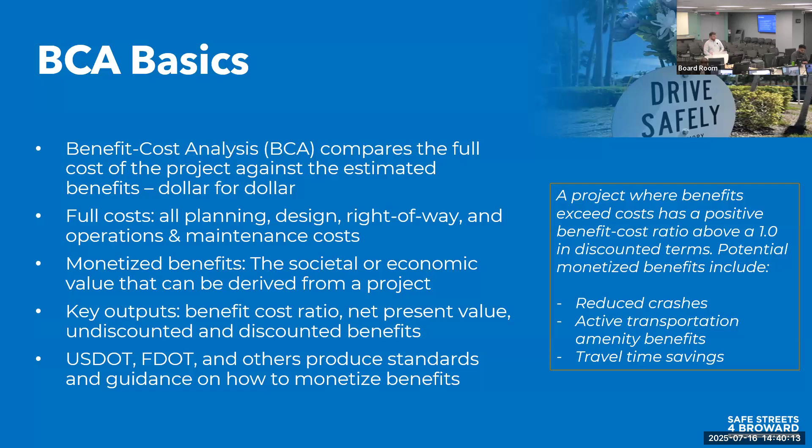But lots of agencies have guidance. USDOT has guidance. FDOT has guidance. There could be guidance from outside of transportation realms. But benefits, again, with safety, are looking at specifically reduction in crashes, but could look at a range of other variables that we've considered within this project, but really just try to focus on the safety for our corridors.

So when we're thinking about the safe system approach, which for my involvement has really been sort of the piece that we've been trying to make our numbers tell the story for. How can we quantify what a safe system approach is looking at? What we're trying to do is actually see what is the benefit when we're combining these different countermeasures as opposed to just looking at them individually.

And we're using these crash modification factors, which are set up by DOT. I think FDOT also has a database for crash modification factors, but effectively these are studies of these countermeasures that we're looking at that's actually then putting in a factor for different types of crashes and how well a countermeasure might reduce them. So they're typically academic studies, things that transportation institutes at universities are studying, and then putting this out into the realm for actually practitioners to then implement

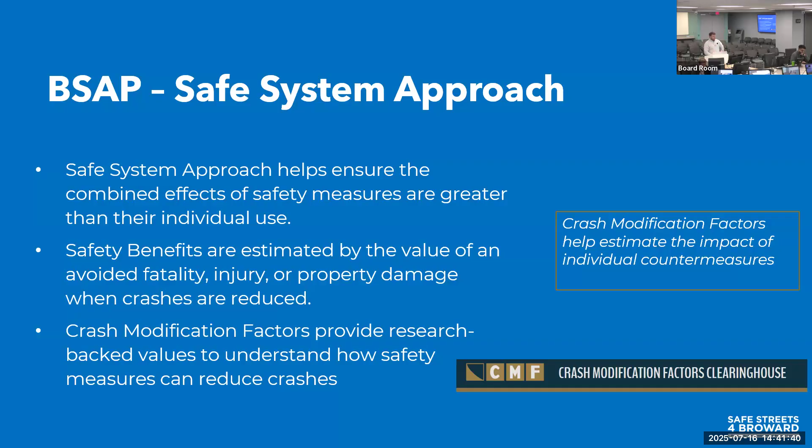within their projects. And so to actually look at the safe system approach, we're actually trying to look at how can we come up with a crash modification factor that's combined for our corridors. So we can actually say, okay, we know that there's X amount of crashes at night and certain types of projects can reduce that versus maybe an intersection crash, which is happening during the day. And we use a different crash modification factor from that countermeasure.

Again, just talking about sort of the BCA guidance, and one of the things that we're just trying to think about is how BCA guidance has been used in the past, especially for safety projects. And typically, one of the reasons why BCAs are required is because there's limited funds. We can't just fund anything that is coming up, and so we're trying to use the quantify tool to assess which of these projects might have the largest benefit.

A lot of the guidance typically realizes that some benefits are just really hard to quantify. And so few agencies, I think, are actually then strictly looking at a BCA and its results to say, okay, if you had a BCA of 1.0, that automatically gets the funding. But its use, I think, is pretty varied. What you see across, whether it's FDOT guidance or USDOT guidance, though, is that they are usually coming down to the same methodologies for quantifying the benefits.

So as you'll see when we used our tool here, some of our inputs come from USDOT assumptions that come from their guidance. Others are coming from FDOT. We thought that was right to, if we have things like the value of statistical life when we avoid a crash, we want to take that from a local perspective. USDOT one is a national level. That's including crashes of equal importance in Montana and Florida.

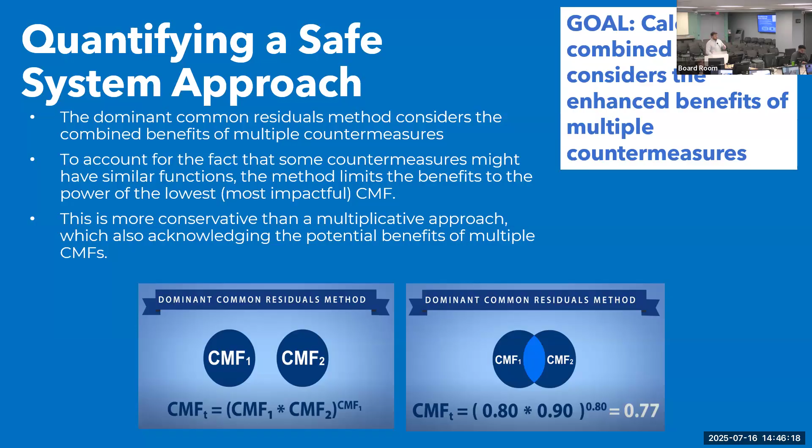What it does is instead of having this combined effect of 0.72 by simply multiplying it, you would have a combined effect of 0.77. So you're saying that we have a combined benefit to get that safe system approach, but it's not trying to say these things are working individually. Combined, there's going to be some redundancies in the crashes that we might be limiting, and this approach combines it. So we think that, one, the guidance allows us to do it, and it's a conservative approach as well.

So now that we know the main methodology for how we're going to quantify the reduction in crashes, we're just going to take a look at what the tool's doing. This is the tool that we designed, and we'll go through each of these pieces. It's really designed so that practitioners, you all, can plug in your project with minimal inputs, things that have to do with the cost of the construction, identifying which countermeasures we're using, and then looking at safety data that you can upload into the tool. The tool should then be able to spit out the key values that we're looking at.

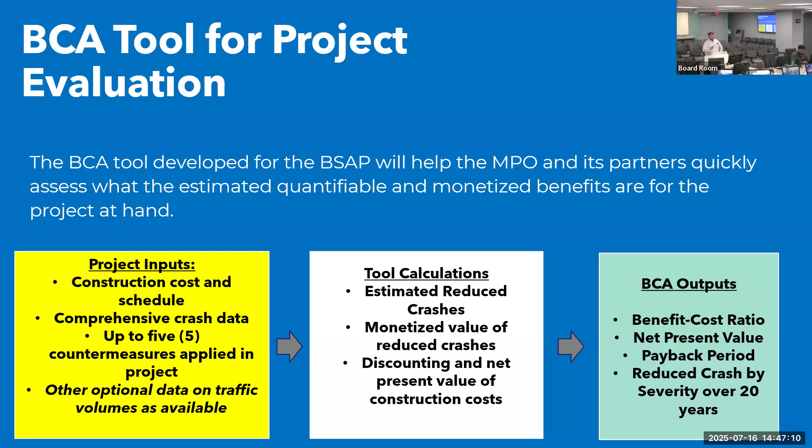It's doing the calculations internally within the Excel tool, and then it'll throw you specifically into the output table where we're going to get those main outputs like the benefit cost ratio, net present value, how many years it will take for the project to pay back its benefits relative to its costs, and a few other metrics that might come out of it.

So I'm not going to spend too much time on some of these things, but as I said, those main user inputs are things that you as the tool user would be inputting. So you need to know the total construction cost. And as you can see in small text, you would also put that in by year. So if it's a 3-year construction, put that in. It's important to try to get the years split because of the discounting nature of the tool.

We're not just saying that there could be $10 million of benefits each year. We have to discount, since benefits in the future might not have the same monetized value as benefits today. And so the tool, as a standard, is using discounting approaches. So we always want to make sure the years that we have are correct. You put in the construction costs here as well as right of way and try to make sure that those costs are as total as possible.

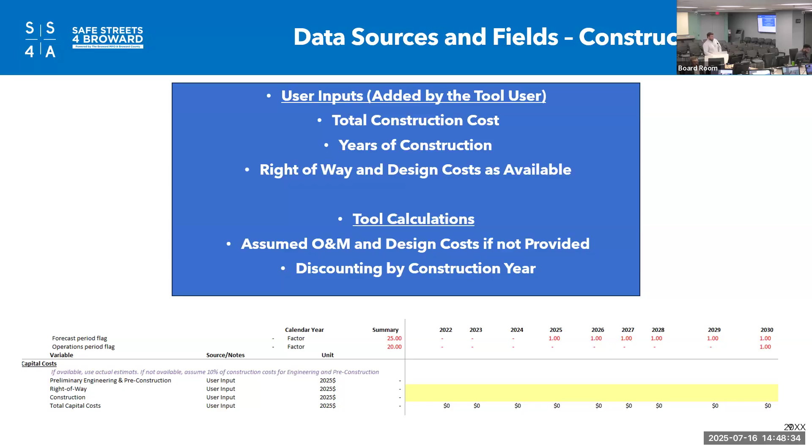You can also put in O&M costs, but our tool also calculates operation and maintenance costs by using, I think it's about a 2% value or a 1% value of the total construction cost per year as an input. So if you don't know what the O&M will be, which I know can sometimes be a difficult piece, that's something the tool assumes, as well as design if we don't really know, which would just be 10 or 20% of those construction costs.

Then the big piece that we would be putting in would be our crash inputs. As a user, this is probably one of the things that would take the longest to input, because, as in my example before, crashes at night could be reduced if we had better lights, but not all crashes on a roadway are happening at night. And so we might have a CMF that's related to those lights, but it shouldn't apply to every single crash.

And so the important thing here is that when we're putting in our crash data, you can put as many years as you might have. It's set to about 5 years, I think, within the main function, but that can be changed. We're looking at the crash data across that corridor, stratified by the severity of the crash using the typical KABCO breakdown, as well as its location, whether it's at an intersection or on the main line of a roadway, the crash type, meaning whether it involved a cyclist, a pedestrian, or just a vehicle, and then its time of day.

These categories are important for us to stratify, because the crashes in the CMFs we've loaded are categorized for each of these types of crashes, so that adding the lights would only apply to those crashes that would happen at night. The CMFs that come from the clearinghouse database we're using tell us which of these crashes are applicable, and that's why we have this breakdown.

I think it would take some time to make sure we're getting that data right. Using tools like pivot tables is really simple, and the set up is made to do that coming from the data. But this is definitely the piece that probably takes the most user input, making sure that we're applying the CMFs accurately.

This is just an example of how we use a pivot table to do this, I think it was for the Northwest 19th Street corridor, where we're getting the crash data between 2019 and 2023. We have the different types of crashes blocked off, just for simplicity, along with other information coming from these crashes. This is how we would be splitting it from the FDOT database of crashes we're getting.

So this is just our list of countermeasures that we have. This is the number of corridors. Again, these are things that were just input into the tool. We did the research on which CMFs are applicable, but the countermeasures, of course, are coming from the SS4A program itself. We're not really doing any design side on the economics tool.

We're simply trying to translate what countermeasures are being recommended, what are the appropriate CMFs if available, and then making sure that when you select a project and select the applicable countermeasures, the right crash modification factor, CMF, comes up.

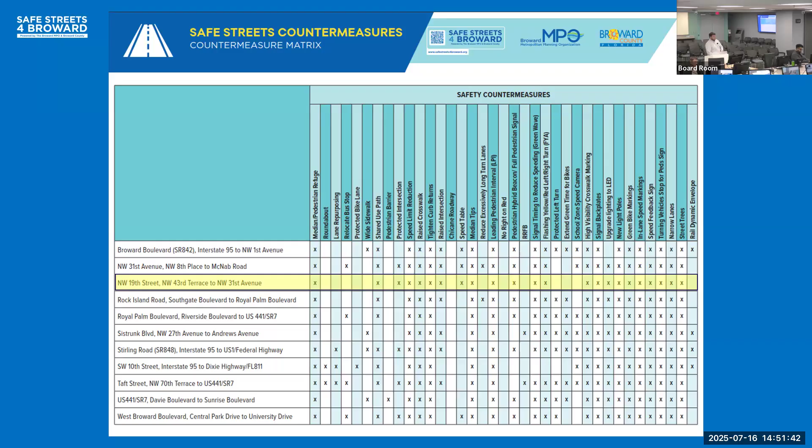It's just an example of how we apply this, and I'll go through this really quickly because I think it's a bit redundant, but this is how we applied it for the Northwest 19th Street corridor. This was the list of the different types of countermeasures that had an applicable CMF.

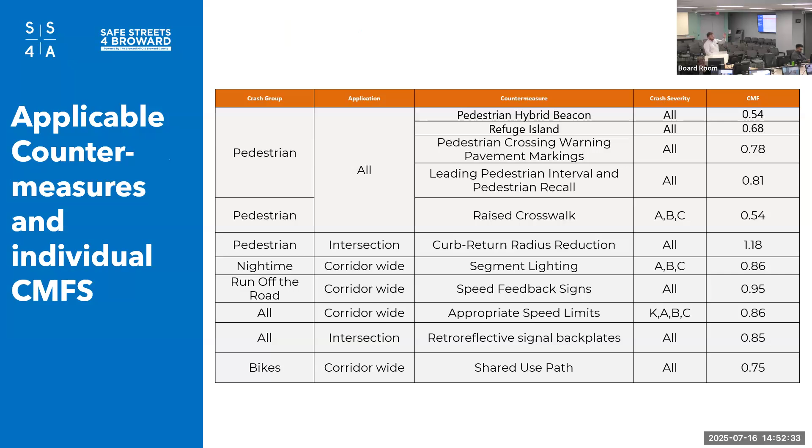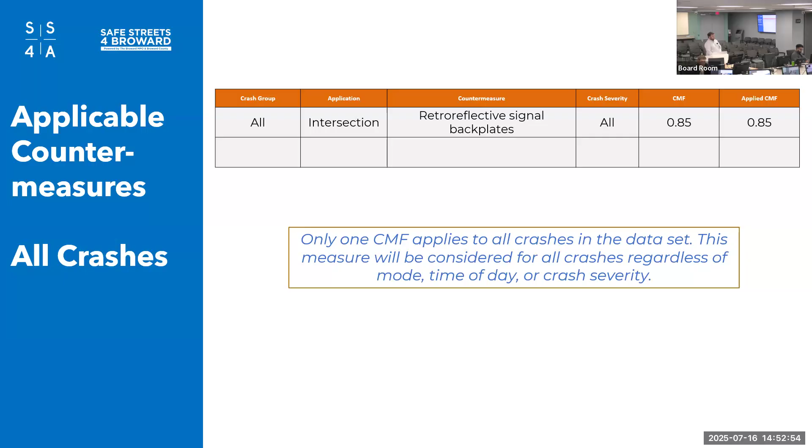The way the tool works is it simply looks at if a project or a crash identified just hits one of these CMFs, you would just apply that. So if any crash was at an intersection but wouldn't have had any other benefits, it would receive a benefit from the retroreflective signal backplates.

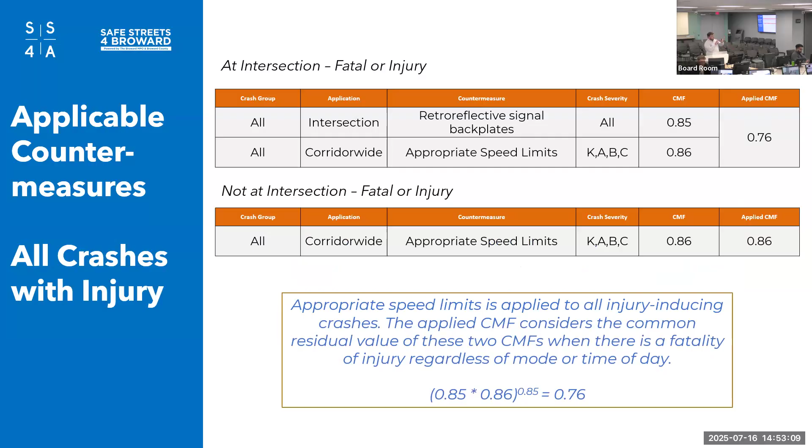But then as we add crashes, that's when we do that multiplying while limiting it to the power. This is how you start to then add in the different crashes to get this combined CMF for that corridor, or really for that type of crash if applicable.

So then, at a high level, this is how we are really applying these crashes, just to kind of then go into how we can take a project that's designed into monetized values.

We're taking here some of the key inputs that we have, things like these are all things that you're not inputting, that are already set within the project. You would identify maybe the opening year, but its operating period, typically we're using 20 years. Number of crashes is coming from the crash data. All these things like the value of a reduced crash are coming from sources like FDOT or US DOT. You would have your costs.

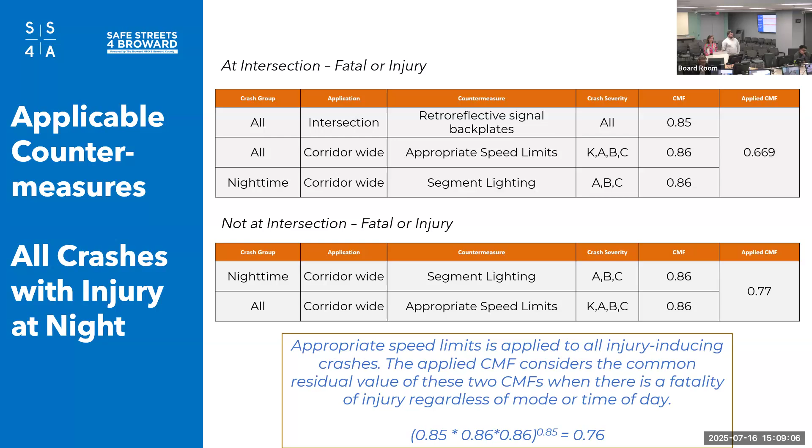Is that the next slide? Where's the slide that shows the reduction, the actual numbers?

So then you have the types of the variable column here. With your reduction, we could add another column showing before and after, and you've got them by type. Then you multiply them by the KABCO numbers on the previous slide - those numbers are in the second set of boxes. So no injury crash is 7,700.

Gotcha, thank you. Sorry, this is new for me too.

I'll preface this by saying when we started this contract over a year and a half ago, there was a big push, to your point, about how federal grants were going to all require BCAs. So as part of our scope we said we need to make sure we're doing BCAs for all of our corridors. But the federal requirements have kind of shifted in 2025. We still wanted to give the region this tool to try to monetize the value of putting in countermeasures, so that's why we created this own unique tool.

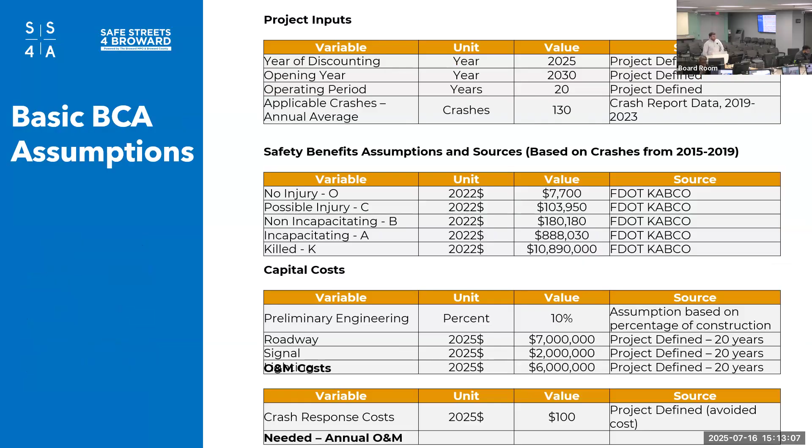Another piece that's changed, which gets a little technical, is the way we discount these things. Discounting can be a little complex, but we were using, for the past 3 or 4 years, a discount rate closer to about 3%, which reflected lower interest rates that were being accounted for. But the most recent federal guidance lifts that to 7%, which makes it harder to show that benefits down the line, say in 20 years, really still have the same value.

It's the right way to do this sort of economic analysis, to include that discounting and make decisions based off of that. It just makes it that much harder to show a benefit cost ratio where the benefits of something 20 years down the line, even though they're steady in real terms, could then be going down once you discount them.

Thank you, Brian. Just a few things I want to point out. First, I believe you developed some kind of tool, probably in Excel, to perform the BCA assessment. Can you share that Excel file with the group? And then maybe in the future, if time and resources allow, a training can be held so everyone knows how to use that Excel file well.

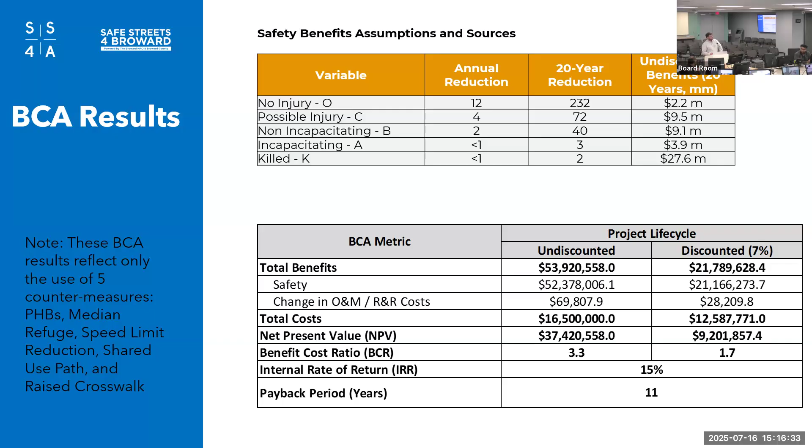What is 23? Slide 23. Yeah, I think it's this, but you mean like that summary table for each project? No, the next slide. This one, yes. Oh, I see what you mean.

We are planning on providing that tool at the end, when we finalize the corridor reports. So we will be posting the tool.

Yes, we're definitely going to need somewhat of an explanation. I know Brian went through this, and I know you all can do it, but we're definitely going to need some form of a how-to guide on how to use it and how to input the crash data so you can get the information you actually want out of it.

I think it's probably useful to go through one of these projects as an example and see the sensitivities of it. If you were to reduce your crashes by half, how that might change the monetized values, or if we were to add one additional pedestrian fatality that I found on this corridor to the data set, how does that actually change this analysis?

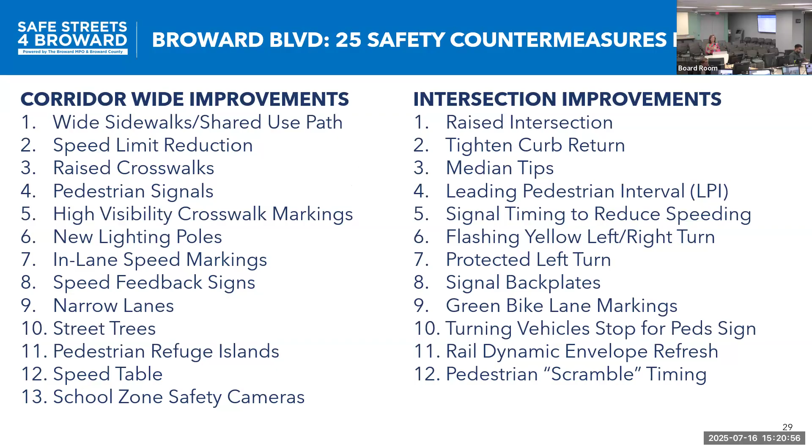So with that, I'm going to run through the 11 corridors really quickly because I'm really proud of the work that we did. So Broward Boulevard, 95 to Northwest First in downtown Fort Lauderdale. We had 25 safety countermeasures proposed, 13 are corridor improvements, another 12 are intersection. And as we talked about, we're trying to use the safe system approach. So redundancy is key. At intersections, we have a lot of overlap, right? Flashing yellow turns, raised intersections, putting all those things on top of each other in hopes of getting to 0 fatalities.

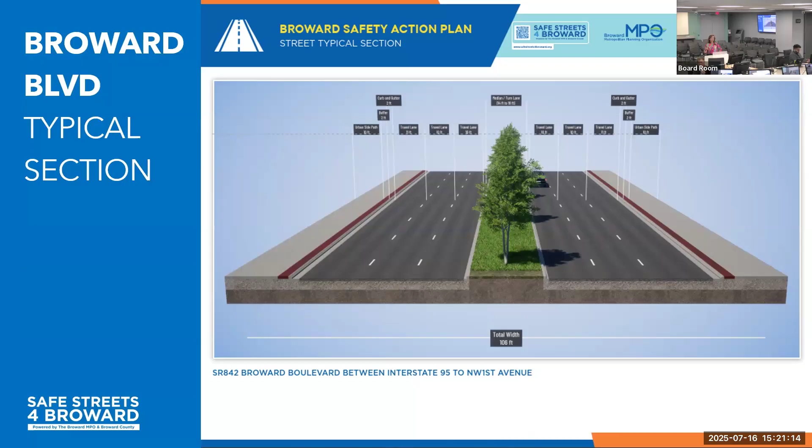This is our typical section that we proposed. No lane reduction because we have like 70,000 cars on our boulevard in the morning. It's crazy. But widen the sidewalks, reassess the bike lane space into wider sidewalk space to create safer streets. And then the corridor, which is kind of small, I'm sorry, but for each of them, we did a concept that's engineered over an aerial with the right-of-way lines.

And you can see all the improvements along the corridor where we aligned bus stops with crosswalks. This is a good one where we had existing bus stops, but we added some mid-block crossings that are signalized, a lot of raised elements to get people to go the target speed of 30, 35 miles an hour. Obviously, you're in downtown. As a reminder, this corridor is on the state's list of top deadliest bike and ped corridors, unfortunately. So really getting those speeds down as you enter downtown is key.

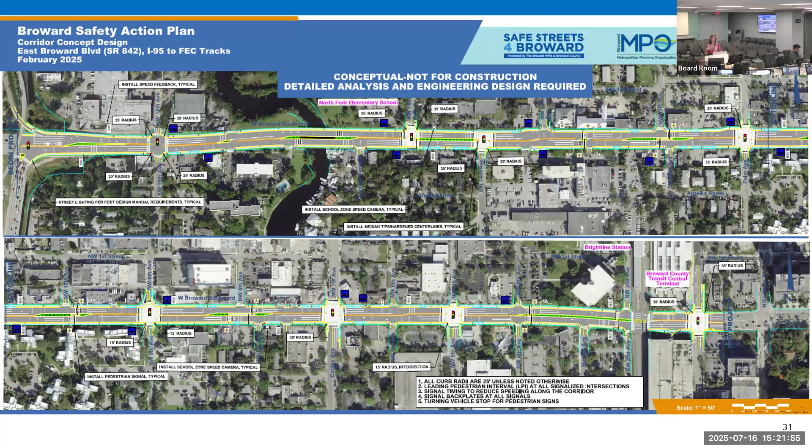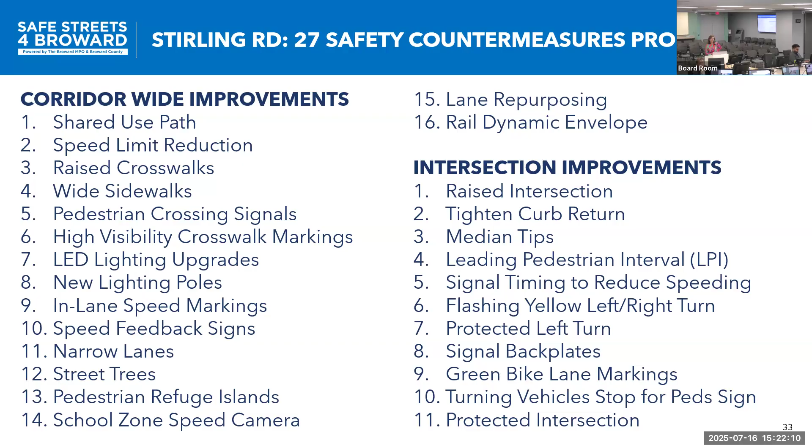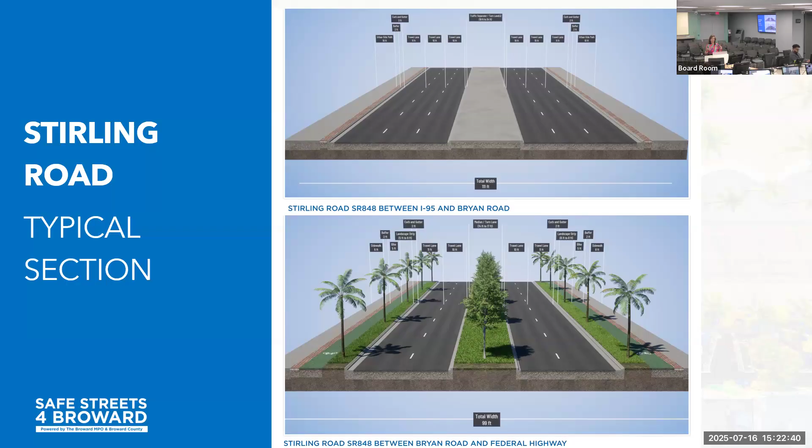Stirling Road is another FDOT corridor. Our corridor was 95 to US 1. On this one, we had 27 safety countermeasures proposed, 16 corridor, 11 intersection improvements. I'm just going to quickly go through these. This one had 2 segments. So from I-95 through the Dania Pointe development to Bryan Road, you can see the top section. We kept the lanes because we've got those big developments on both sides, north and south. And then as you go east, we were able to repurpose the lane going east to US 1. You've got a residential area and were able to get those protected bike lanes, wide sidewalks, tree-lined. So that's the intent of Stirling.

Here's the layout. You can see the interstate on the top left, and then Dania Pointe, and then that Oakwood Plaza is on the north and south. As you get to Bryan Road, which is that first intersection that's coral color, it's a raised intersection to enter into the more residential local context. And then through there, you've got the 4 lanes, medians, offset sidewalks, tree-lined streets, raised intersections, raised crosswalks to connect transit.

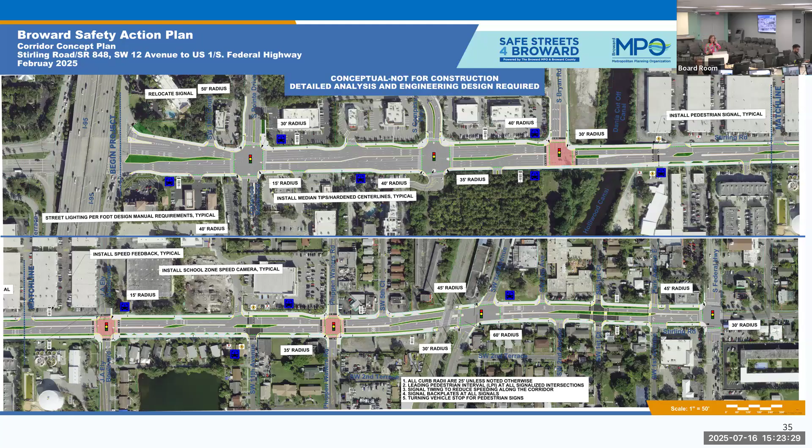We've got kind of a wonky intersection at the railroad that we were able to tighten up. People are having issues stacking up on the train tracks and not being able to see the signals. So really tightening up that intersection there. And then just really tightening everything up and being able to create a safer street.

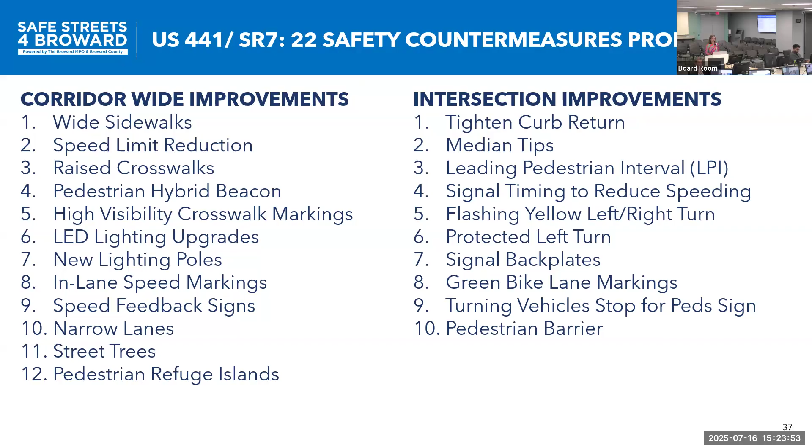The third FDOT corridor is US 441 from Davie Boulevard north to Sunrise Boulevard. This is Fort Lauderdale on the east, Plantation on the west, and Lauderhill on the north. So we've got 3 cities. On this one, we've got 22 total safety countermeasures proposed, including 12 corridor-wide and another 10 intersection.

Within this one, we have 2 cross sections, very similar, keeping all 6 lanes. This corridor has a plan to have Premium transit on it, so we were aware of that. So there hopefully will be a bus priority lane at some point. But widen the sidewalks. The one on the bottom is to take the existing bike lanes and make them into wider sidewalks. So we're able to reprogram that space and then obviously keep the medians and narrow the lanes.

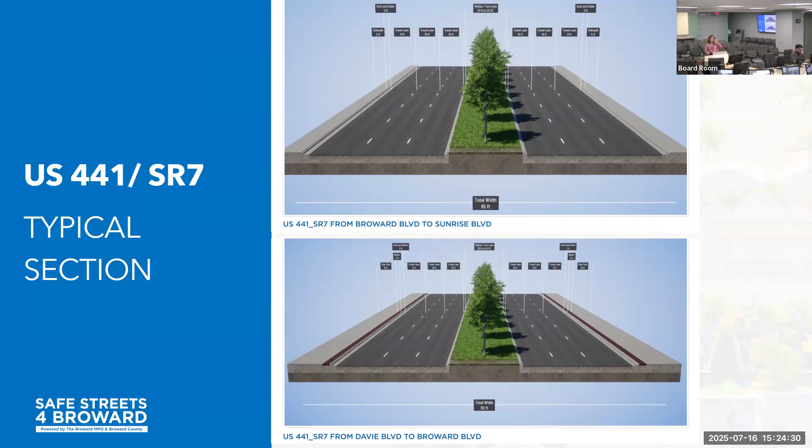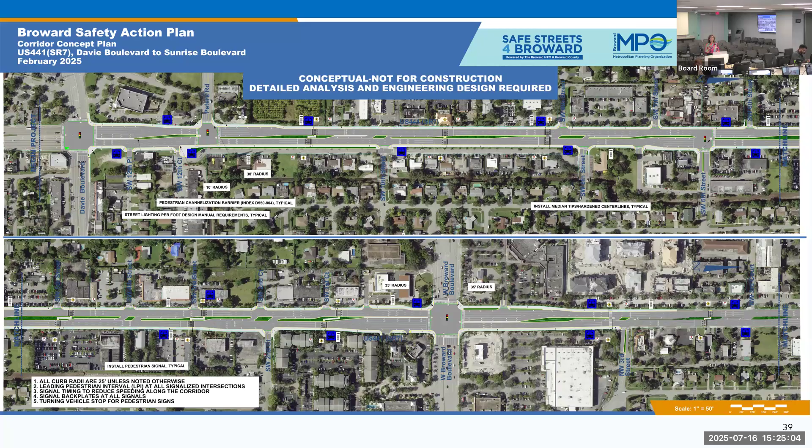And then this one's a little longer, so I've got 2 pages, but the top left is Davie Boulevard, and then you move north to the right. And really trying to add medians where we could to improve safety, add mid-block crossings, raise those crossings, align them with bus transit to try to get the speeds tempered just by trying to narrow everything up and then widen those sidewalks. So unfortunately, not enough space to put in landscape buffer between our sidewalks and our cars, but just trying to squeeze everything down and then get the speeds way down was the main goal here.

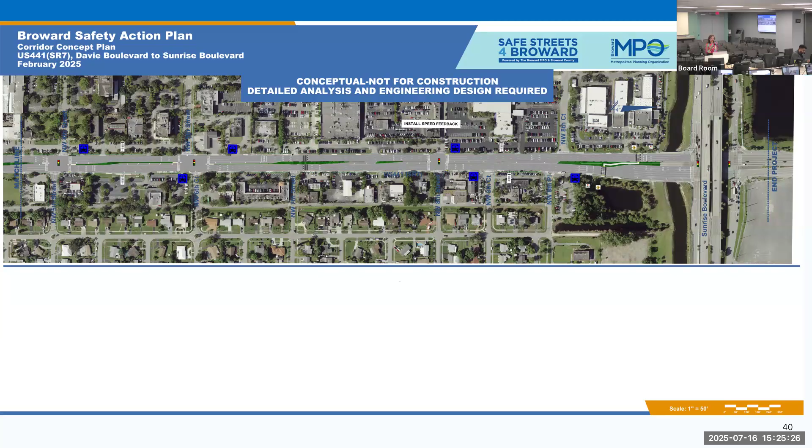And it goes all the way up to Sunrise Boulevard. You'll see on the right side of this screen, there's a trail that runs along the south side of Sunrise Boulevard. And so we've included the trail crossing as a proposal there to get people across safely.

So then we move into our county corridors. So 31st Avenue is our longest corridor. It's about 5.2 miles from Northwest 8th Place, which is just south of Sunrise Boulevard, to McNabb Road. This touches 5 cities, if I can remember all of them. Fort Lauderdale, Lauderdale Lakes, Tamarac, Lauderhill, and who did I forget? Oakland Park. So, right? I'm looking at Karen. Is that right? So 5 cities.

This one got packaged up by Broward County to propose for a Safe Streets for All implementation grant. So very excited about this one moving forward. This is unfortunately the riskiest Broward County street to travel on currently, but hopefully not for long. We have 26 safety countermeasures proposed, 15 corridor wide, and then another 11 at intersections, of course, trying to get that redundancy at all those locations.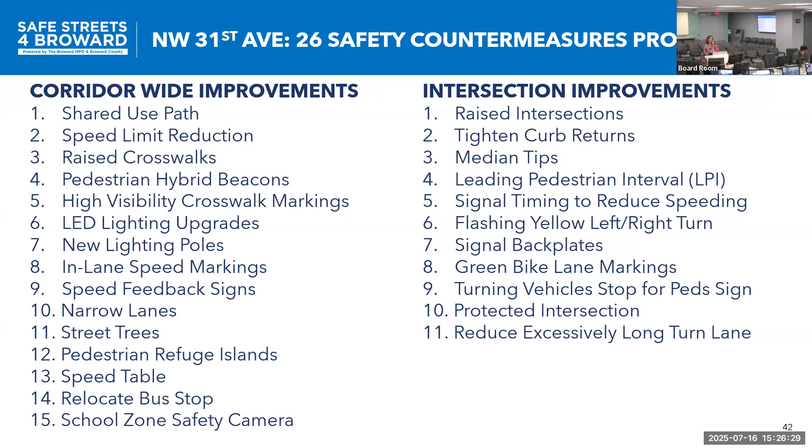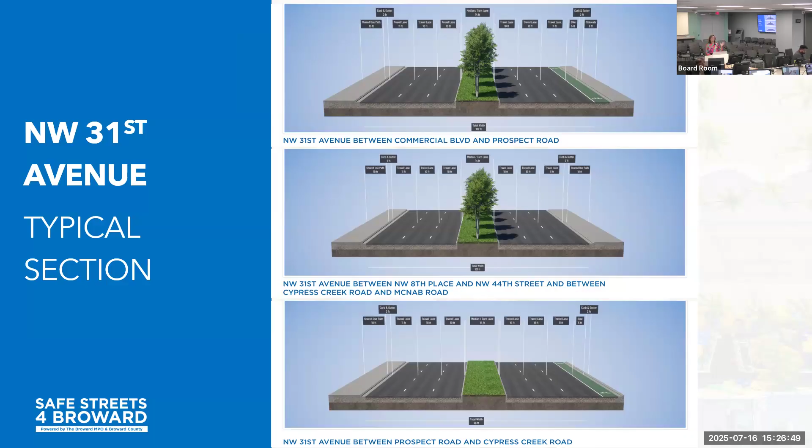Our typical sections, we had several because the right-of-way changed and then the opportunities changed, but basically trying to get really wide sidewalks, especially a consistent wide sidewalk shared use path on the west side of the street as you move north. In some areas, as you can see, we have dedicated bike lanes, so we kept those where they were.

And then this one's really long, so I apologize, it's super small because it's 5 miles. And I didn't want to bore you with like 20 sheets. But overall, you can see we've laid out all the lanes, mid-block crossings, raised intersections, narrowed the lanes, added trees, and then all the technology. We have a school zone on this one, so proposing adding all the school zone amenities, proposing cameras, the new safety cameras as well.

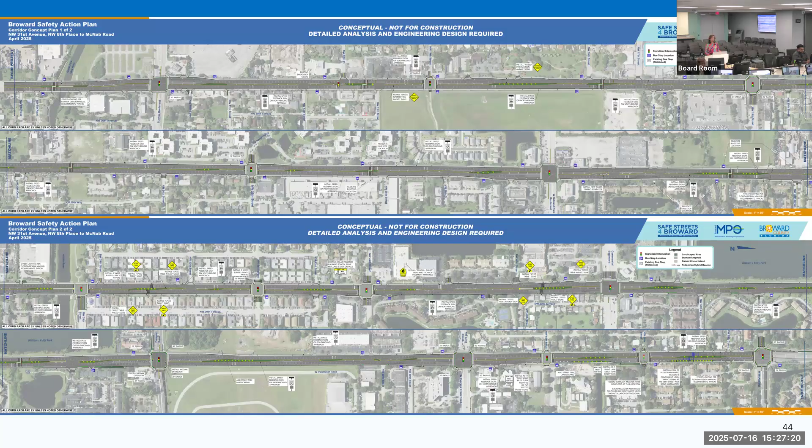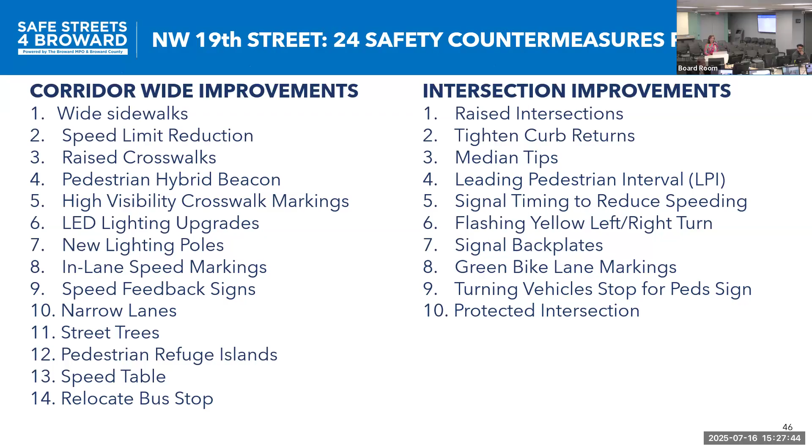19th Street is next. 19th Street is also a county corridor. I think my limits are completely wrong. I'm sorry. So the limits on this one are 43rd Terrace all the way to 31st Avenue. The corridor wide improvements, there's 14 and then another 10 intersection for a total of 24. So trying to get improved speeds basically is a big one here. We do have some trucks with some industrial here, so making sure that we're accommodating those turns.

But on the 43rd to 441, there's actually an MPO county project that's being constructed right now. So that'll be the cross section you see on the top. And then from 441 east to 31st Avenue, basically we're going to take the shoulders, narrow bike lanes there now. So kind of take that space back and do really wide sidewalks on either side and then narrow everything up.

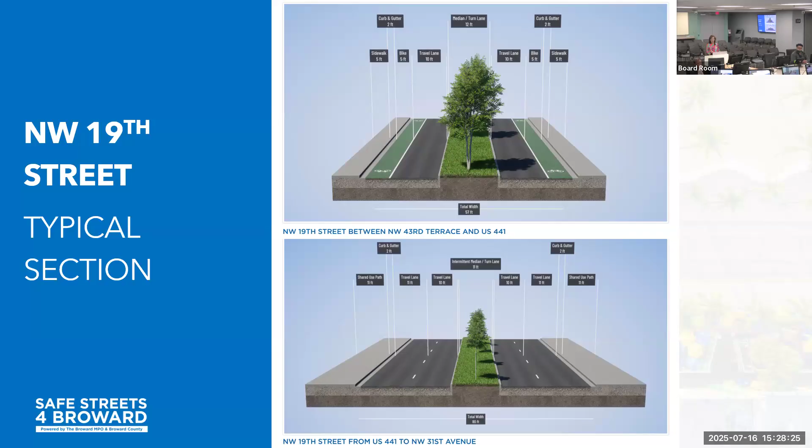Add trees. So here you can see on the top, the center is your 441 intersection. So we'll take it kind of from there to the east to 31st Avenue, add medians, add trees, raised intersections, raised crosswalks. We've got some speed tables as well. You can see the industrial along the north. So making sure that trucks can make that turning movement. So made sure we didn't block off anything with those medians, but trying to balance everything.

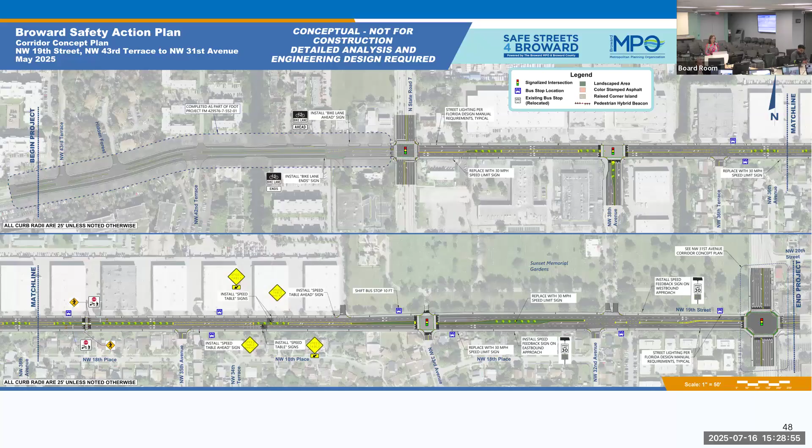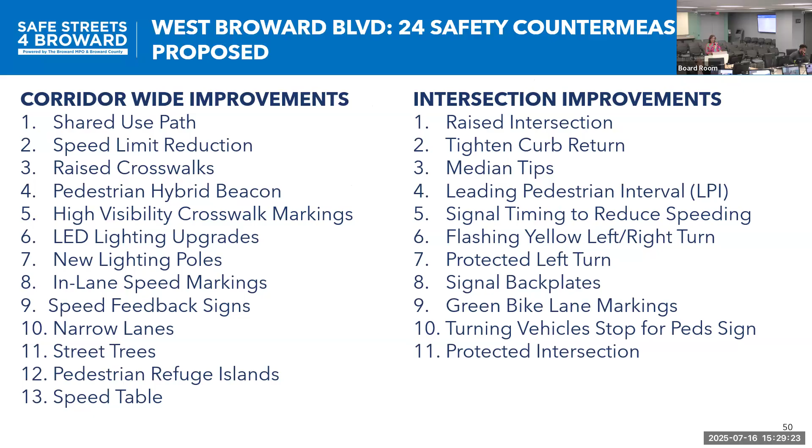All right. West Broward Boulevard is also another county corridor that's in the city of Plantation. Limits are Central Park Drive to University Drive. So this is a county corridor. West of University is not state, it's county. And here we have 24 safety countermeasures proposed, 13 corridor, 11 intersection. This corridor is where the county offices are, if you guys have been to Broward County.

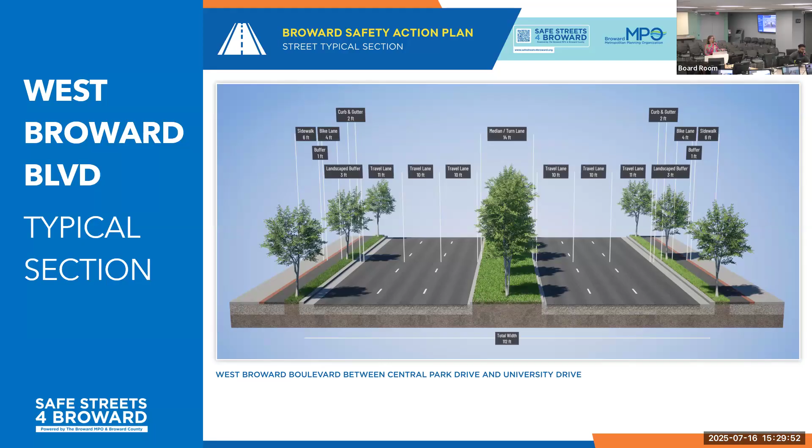The cross section is keeping the lanes, but basically narrowing them up. So you've got 10-foot inside, 11-foot outside for transit. And then by kind of squeezing everything together, we can create that space that's separated for bikes and peds. So we've got really a narrow landscape buffer. I think it says 3 feet. And then you can see the bike lane and the sidewalk are there. And trying to fit as many trees as possible to get that enclosure feel.

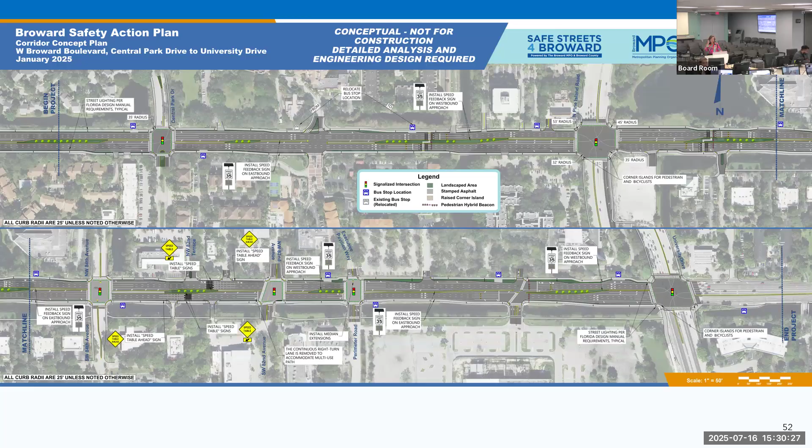This project, top left is Central Park Drive. You can see Central Park is on the north side there. And then as you go east, Pine Island, and then the mall, Broward Mall, is on the south as you go east on the bottom to University Drive. Again, medians, trees, aligning bus with raised crosswalks, a couple of raised intersections to really get those speeds down, speed radar signs, and then of course all the technology at the intersections.

All right. So starting with city corridors, Royal Palm Boulevard is in the city of Margate. This project is Riverside to 441. We have 23 safety countermeasures proposed on this corridor, 14 corridor, another 9 intersection.

This one is 4 lanes existing, but really, really wide lanes and a very wide median. So we're able to kind of reallocate the space from the median to create 2 landscape buffers on the sides, is how we did it. So no new right of way, just taking that space, reallocating the space.

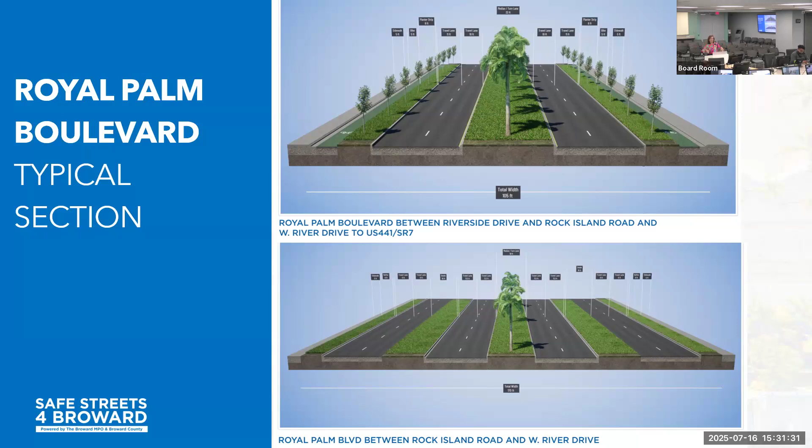So you can see we got protected bike lanes and sidewalks on both sides on the corridor from Riverside to Rock Island. And then when you get to Rock Island going east, there's these frontage roads that exist. So our thought was we'll use the frontage roads that are very low volume as our parallel bike facilities and keep the bikes and the peds separated, and then just narrow up the street to do some traffic calming.

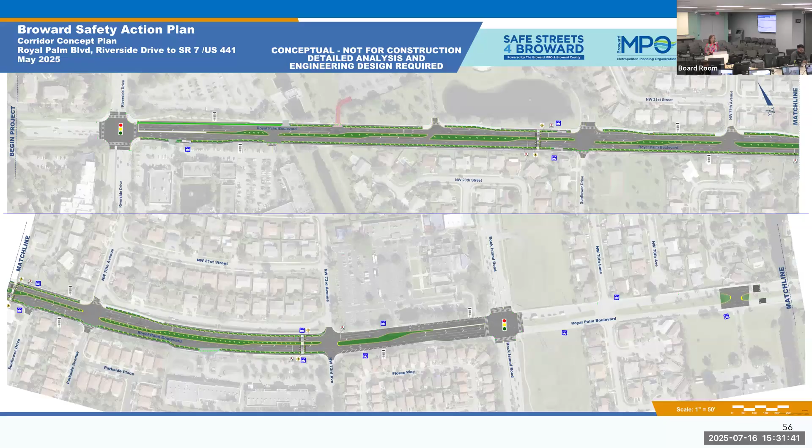And these are the concepts. So you can see a lot of green is kind of shifting to either side. Right now there's a really wide median. And then here we just did spot improvements. So we just showed the aerial with the spot improvements. So you can see kind of some intersections and some raised crosswalks, some median tips.

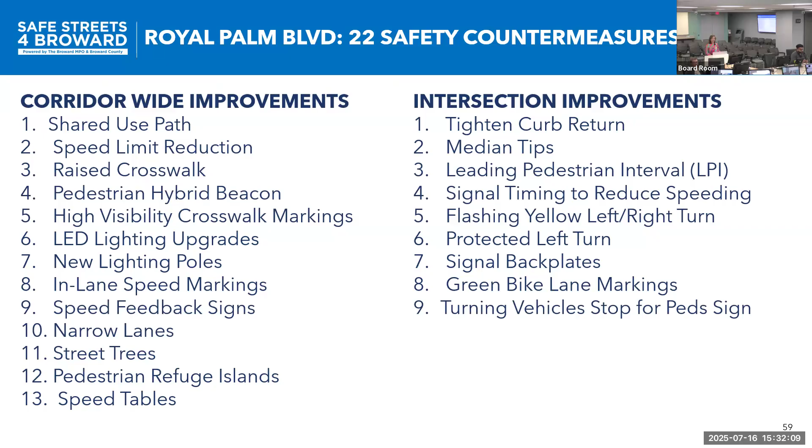Rock Island is another corridor in City of Margate. Our limits are Southgate Boulevard to Royal Palm. This one has 22 safety countermeasures, similar to Royal Palm. It's a similar suburban context. So 13 corridor, 9 intersection.

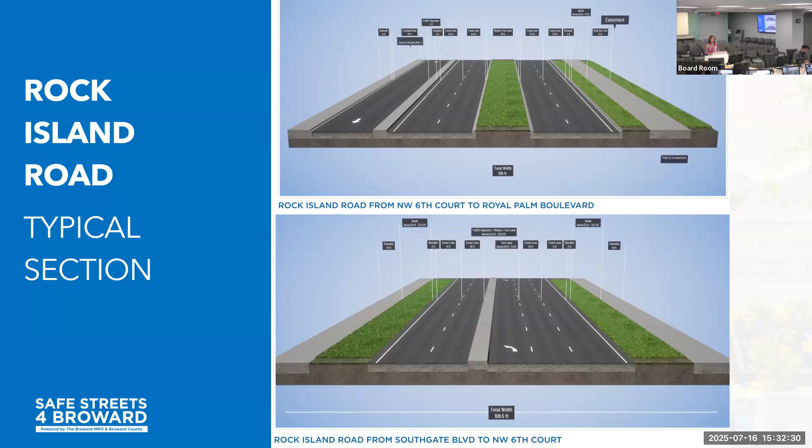This one also has that frontage road, as you can see on the top. So you've got kind of this frontage road feel, so kind of putting the bikes there. And then as you move south, the frontage road drops. And so really creating those wide separated spaces for the pedestrians and then narrowing up all the lanes.

Speed is really a big deal on Rock Island and Royal Palm. You would think because it's in the suburbs that there would be less people crashing, but there's a lot of crashes here. And the speeding is evident when you're out there.

So this one starts at Southgate Boulevard, which is kind of not a square intersection, as you can tell. So making sure the turning movements work for the vehicle types. We tightened up that northbound right turn, which was kind of a high-speed right. So we put some curvature in it to try to slow that down.

And then you can see just north of Southgate Boulevard, there's a canal crossing. So we proposed adding a trail crossing there with a raised crosswalk and a signal there. And then as you move north from there, it's really narrowing up the lanes and then creating really wide shared use paths on both sides.

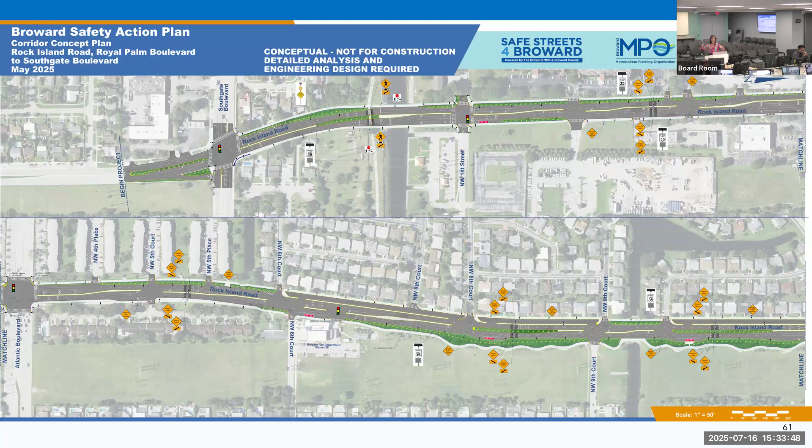And as you move north, north of 6th Court on the bottom there's this really big swath of green. And we understand that's an FPL easement, and the city has an agreement. So we're able to kind of widen our trail onto that easement, which was really useful. And then this goes all the way up to Royal Palm Boulevard. So it intersects actually with the other project that we did.

The next corridor is Sistrunk Boulevard in the city of Fort Lauderdale and partially in Broward County from 27th Avenue to Andrews Avenue. Sistrunk Boulevard, unfortunately, is the riskiest city street in Broward County. So a lot to do here. We proposed 25 safety countermeasures, 14 corridor, 11 intersection.

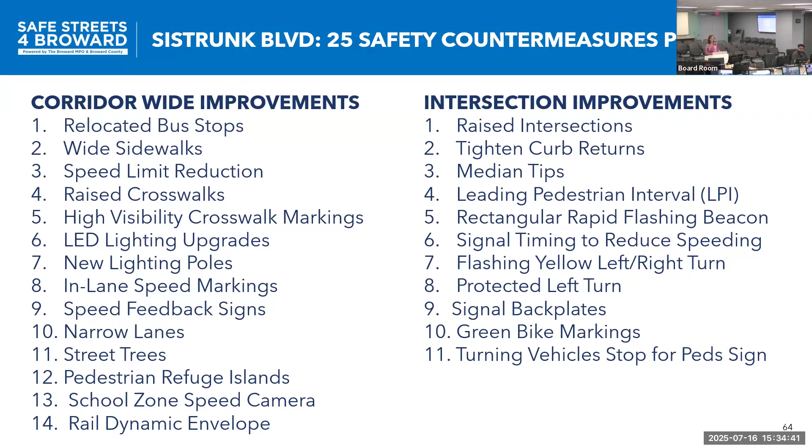The city and the county have done a lot of work on Sistrunk over the years. So some of these improvements you'll see listed are already there. Wide sidewalks is one of them. They're already there. But I wanted to make sure we were giving you a holistic list, but not trying to take credit. So good job to the city and the county already for doing a lot here, but it's still really risky. So what else can we do?

This one's really narrow already. On the west end, which is the county jurisdiction from 27th to like 22nd-ish, it's 4 lanes right now. We kept it 4 lanes, but tried to just squeak the lanes a little tighter so we could widen the sidewalks and try to separate those sidewalks.

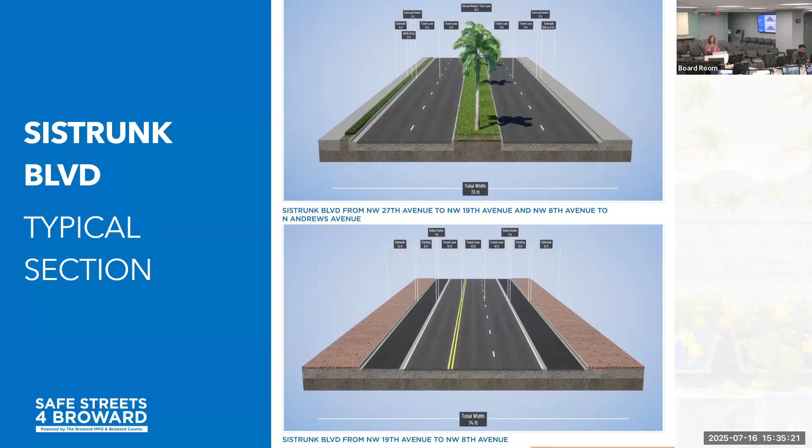And then in the city section, 22nd over to Andrews, you've got 3 lanes for most of it. And so really trying to squeeze it again, but it's really tight already. We noticed when we went out there, there's 9 and 10-foot lanes already. So really the improvements that are key on this one are going to be the lighting, which is a huge issue out there. It's really dark at night.

They have decorative lighting, and some of the lights have already been retrofitted to have a brighter fixture, but most of them haven't been, so I think that's hopefully an easy immediate fix for us. Also adding some more traffic calming, because hopefully if there is a crash in the future, if speeds are lower, hopefully it won't be fatal, right?

So adding raised crosswalks. The city is already proposing 5 new crosswalks on this corridor. I think those are going in maybe as soon as this year. So I'd really love to get this finished. So maybe you can raise them, Karen, wink wink, so we can get some traffic calming and then maybe raise some intersections.

One thing, we had both of our public meetings at the YMCA that's right in the middle of the corridor, and that's really a community center. You've got a lot of people walking to that center, but yet there's really no intersection control at that intersection where people are coming from the south to get to the YMCA on the north. So we proposed kind of a tabletop speed table for the length of the face of the YMCA, so it's like a shared street in front of the YMCA, for traffic calming and pedestrian safety there.

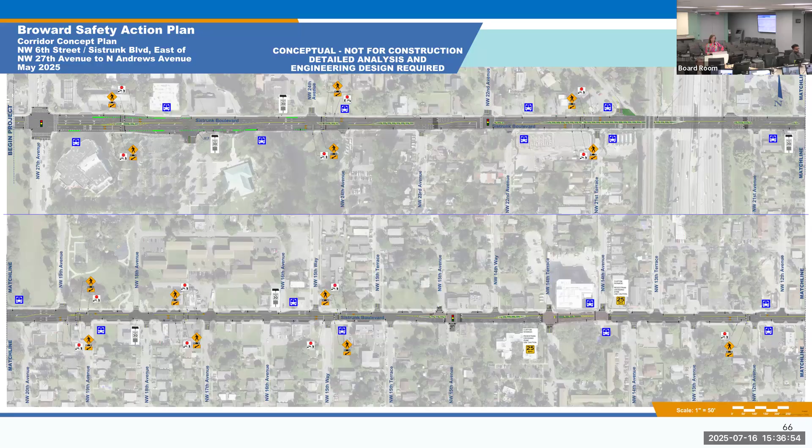So a lot of improvements proposed on this one, but we were scratching our heads because it's already narrow, right? It only has a few lanes right now. So really, how do we add more safety and get creative on this one? Lighting will be key, and safety, safe speeds will be key on this one.

Southwest 10th Street is a corridor in Deerfield Beach. This one is a city corridor east of I-95 over to Dixie Highway. We proposed 22 safety countermeasures, 15 corridor, 7 intersection, and this one we actually proposed roundabouts.

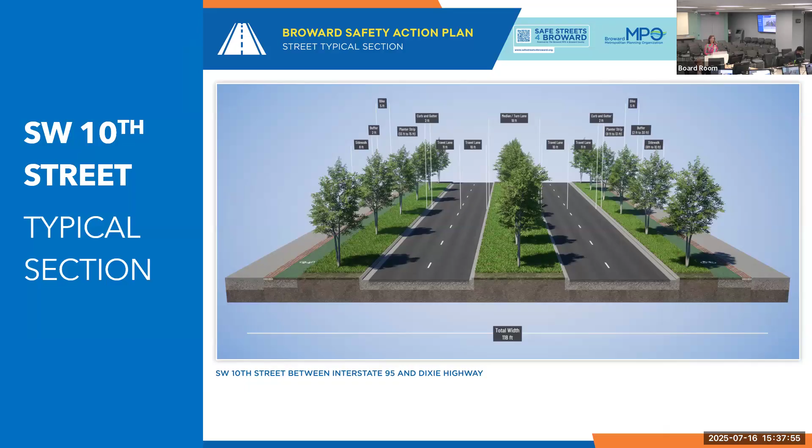So I'm really excited that we got to do something a little bit different on this one. This one is also 6 lanes east of the interstate, but the volumes showed that they would warrant a repurposing to 4. So we gave them an opportunity to reallocate that space to create protected bike and ped opportunities with tree-lined corridors on both sides.

And then this is the beautiful roundabouts. So west of here, I'm sure all of you know, we have the Southwest 10th Interchange Expressway project, and that'll tie in right at where it says begin project. The good news is that the engineer who designed this project is also leading that project. So hopefully we'll get some, what do we say?

Some synchronization between the two, because he's being thoughtful of what to design there. But the intent there is they're going to do a 4-lane local street on Southwest 10th west of here, and then the expressway functions will be separate. So those 4 lanes will tie right into these 4 lanes was the intent, giving the city an opportunity to redesign it.

And then we did preliminary lane repurposing analysis, and then we also did preliminary roundabout analysis too, to justify these. And then we were able to get creative with the geometry to fit it within the right of way. So really excited about this one. This one was also packaged as part of an SS4A implementation grant to USDOT, so fingers crossed we get both.

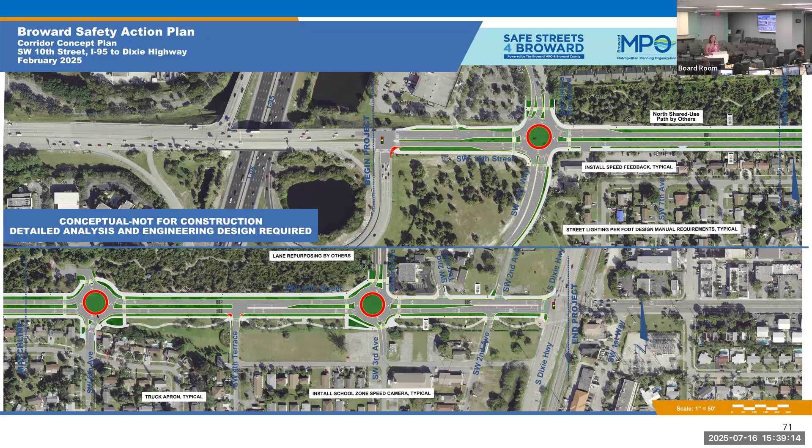Taft Street is next in the city of Hollywood. The project limits are 70th Terrace to US 441. This one has 23 safety countermeasures proposed, 12 corridor, 11 intersection.

This one, we had entertained a lane repurposing and then met with the politicians, and they were kind of on the fence to move forward on that. We had some for, some against, so we kept the 4 lanes to proceed in the corridor report. So really about slowing speeds, adding medians was a big push from the city because access management was kind of a mess here with the commercial on the north.

And then aligning our crosswalks with our bus infrastructure and then raising those crosswalks, trying to create space for pedestrians to cross safely. This area has a lot of working class families, and then you've got all the commercial on the north, and schools on the south. So a lot of people wanting to be able to just walk across the street instead of having to drive. That was the need that we heard at the public meetings.

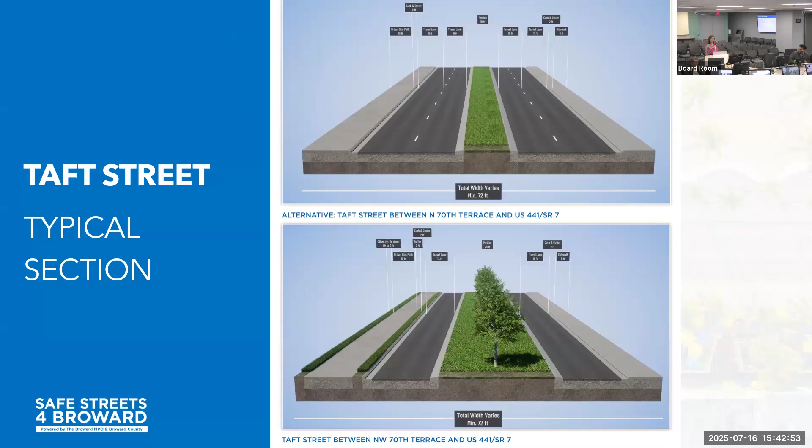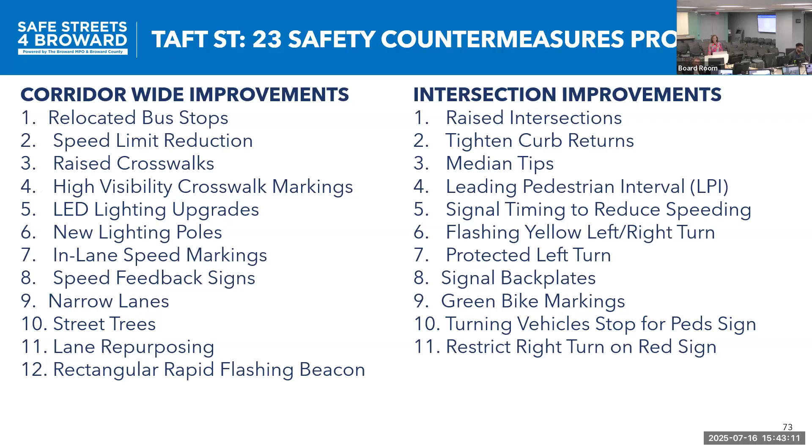And now we're going to quiz you all on how many safety countermeasures are on Taft Street. Does anyone remember? No? Oh, 24. I don't even know if that's the right answer. Close, see, 23. You're almost there, she was so close. Yeah, exactly, 20 something. So let's just remember that. Okay, well then I need the lane repurposing, then I can add that.

All right, I'm going to move on if that's all right. So we are creating a quick build design guide as one of the deliverables for this project. The intent is because we need safety now. We don't want to wait 10, 20 years to get all these projects in the ground. We want to get projects in now. So what are those tools? Creating a guide that gives guidance on what's the process, what materials are best practice, and what's the approval process for those projects. The guide has about 5 sections: introduction, the project development process, a materials guide of best practices, and an evaluation guide of how to evaluate if projects are successful. And then we did an outreach chapter on best practices, but I'm sure you guys know how to do that.

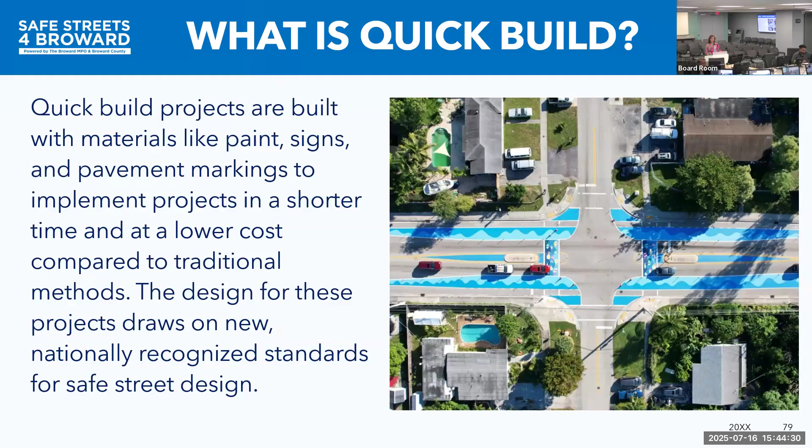Defining quick build was a big question, kind of like what is quick build? So I'll just read this really quick: quick build projects are built with materials like paint, signs, and pavement markings to implement projects in a shorter time and at a lower cost compared to traditional methods. The design for these projects draws on new nationally recognized standards for safe street design. And of course, Deerfield Beach is highlighted right there with their quick build project.

It also includes some potential outcomes. We're looking to increase safety. Number one, we want to make sure we're inviting public use of our public rights of way. Make better use of our public streets. Number three, improve business and walkability. We want people to spend money, cars don't spend money. So getting people out, improving business. Number four, improving travel options. We want people walking, biking, using transit, and feeling comfortable. So how do we do that? Through quick build methods. We included this about project types just so you can understand what's quick build compared to the long-term capital on the right.

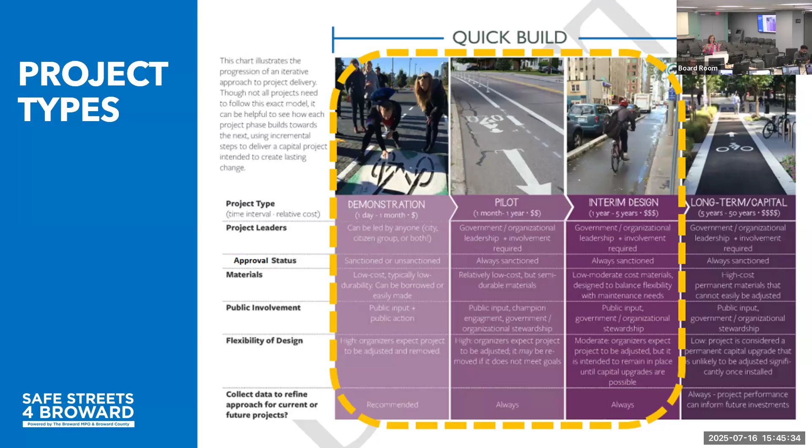So there are demonstration projects, which are like the day where you have an event and you do some chalk and really show people what it could be, maybe have a street fair, a bike ride, things like that. Then pilot and interim are kind of similar, but pilot is less permanent, and interim is more permanent, showing the different phases of quick build you could do to test things out. And then different project intents: intersection projects, multimodal projects, traffic calming projects, and creative projects that are a one-off of a quick build.

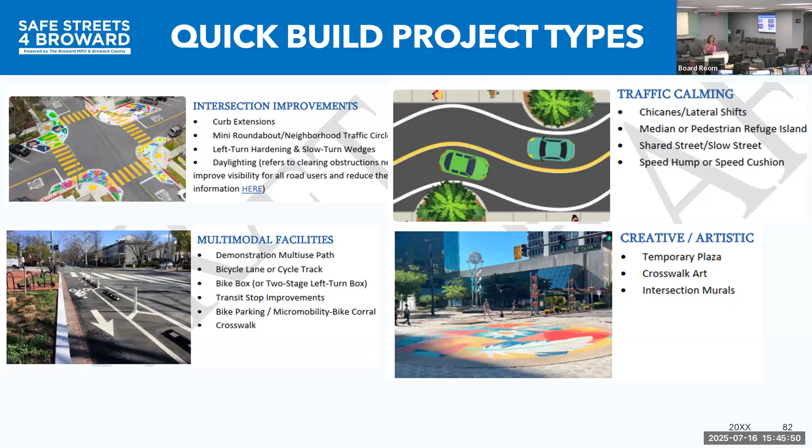And then we spoke with Broward County about their process. I know a lot of cities have the maintenance agreement with Broward County, so we included a process of what that looks like in the manual. And of course, an evaluation chapter, reminding you to take before counts so you can compare them after to make sure it's worth moving forward or maybe not. That's why we do quick build.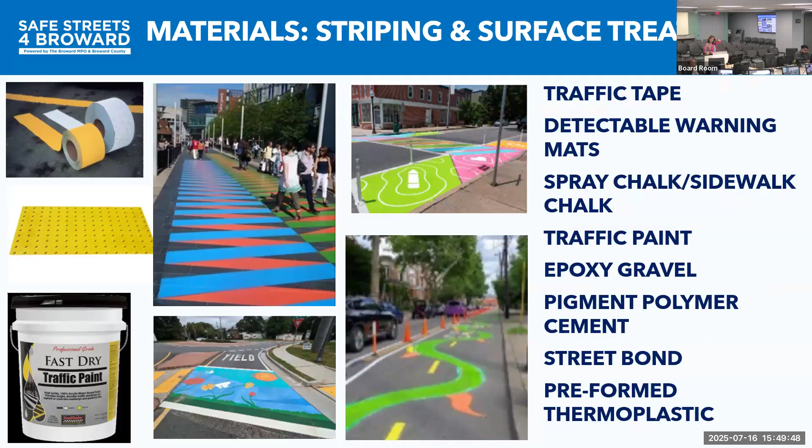Some materials included—we've got all types of 1-day materials on the left with tape and traffic paint, to more permanent materials like thermoplastic on the right. So all different kinds of materials are outlined in there, the cost, the type—I'm sorry to interrupt.

Yeah, we can talk about it after the meeting. I don't know if you want to show this slide because of the colors. Have you seen the latest memo from USDOT and FDOT? We can talk about it after the meeting. Okay, that'd be great, thank you.

Okay, these pictures are dated. I'm sorry.

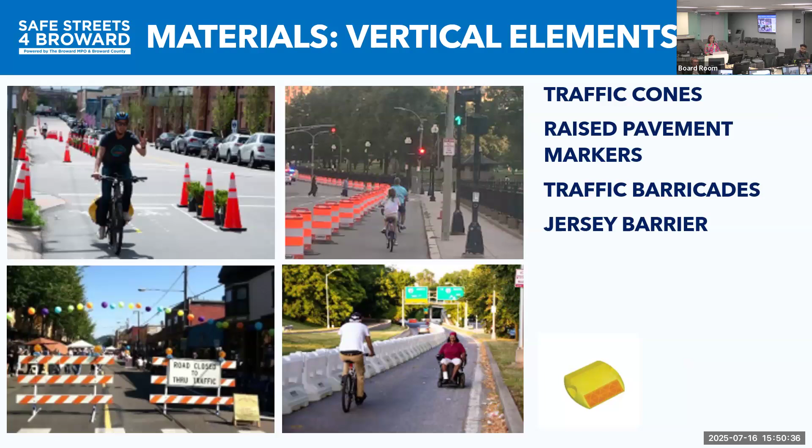Other materials, vertical elements. I've got three slides for vertical elements. These are more like temporary, like cones, barricades. These are plastic jersey barriers on the bottom here. So really doing those quick, test it out.

And then more permanent, like semi-permanent quick. You've got low profile vertical delineation, the wave delineators. Got the delineators of all types on the right there, the planters on the left, bottom left. So all different types of vertical delineation to create the space that you're looking to create.

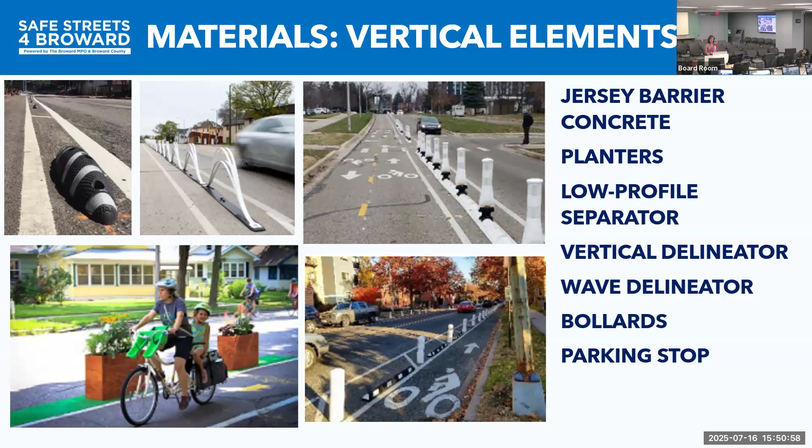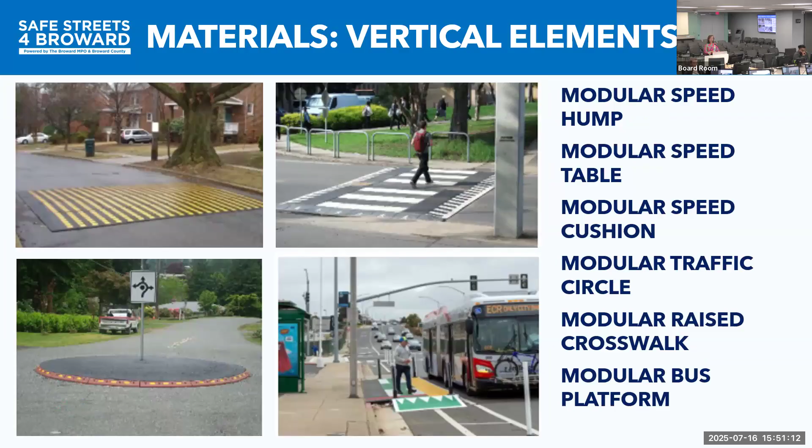And then you've got all these modular elements now. So from speed tables to raised crosswalks, traffic circles, bus stops are all these modular things that are like Legos that you put together. Really cool. So all types of different opportunities to create the project that you need.

And then we have a space for other, so stencils and signs and things like that. So the signs that are top right and bottom left are more like the one day, quick inform, right? They're not standard, but then the bottom right is more like MUTCD. So you really have to work with kind of what you're needing to propose or transmit to your community.

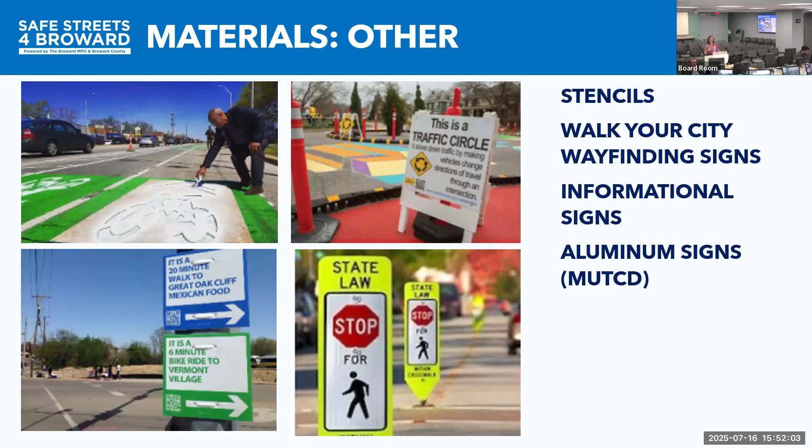I remember when we did the roundabout at 13th Street, Karen, we put a sandwich board in the middle that said, remember, yield to traffic in circle. People just weren't used to it. So even though we had the yield to traffic MUTCD sign on the yield sign, we added another graphic that showed the circulating. So really more education in a temporary way.

And then really evaluation. So we did an evaluation chapter to say, how well did this project meet your goals? How effective were your materials? Would you use them again? What did we learn? What are your successes?

And then we included these four chapters that basically are questions related to evaluating safety, and then evaluating public use, and then evaluating business. So these are just questions that you could use. And then improving travel options.

So really getting you to think about what data you need before and after, instead of, a lot of times, we wait until after and then we're like, oh, we should have checked with people before how they felt instead of asking them after only, so that we can compare before and after. You'll notice in here, some of these are quantitative, like speed counts, tube counts before and after, but then some are qualitative, like talking to people about how they feel. So it's a mixture. You'll get to decide what's best for your city or your project.

And then, of course, community outreach. We want to make sure that we're doing community outreach to build trust, but also inform the community why you're doing it with paint and sticks instead of concrete. I think a lot of people freak out when they're like, paint and sticks, why? But really that information gathering and doing that before, during, and after.

We really want to improve the outcome and improve the transparency. And then a lot of people have really good ideas, so that kind of prevents those mistakes in the future. So going out to the community. And then, of course, just a list of kind of all the opportunities, just so that you have a checklist.

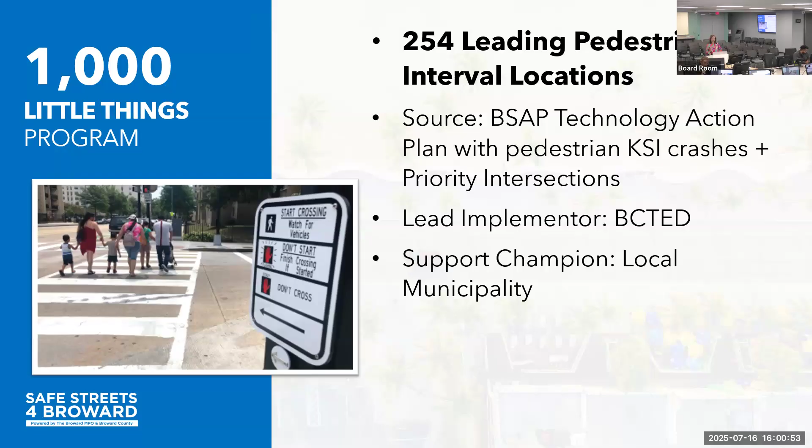We've identified 254 LPI locations. These were identified as part of the BSAP Technology Action Plan and also have at least one pedestrian KSI crash. I also added the priority intersections to this list. This obviously would need to be led by our county traffic engineering department because they oversee maintenance for all of our signals. But I'm going to give a list to all of our local champions, so if it's in your city, you'll get a list of these locations so you can be aware.

The next one is bike detection. This also came out of our technology action plan, where we've had bike KSI crashes. We had a couple meetings with the county about how to do this, and basically what they said was if they have the Iteris camera system, you can add a bike detection zone. If you look closely, there's a B1 marker in the bike lane. So if you're biking in that lane and enter that zone, the signal will know you need a green light. If only a bike shows up, you'll still get a green light.

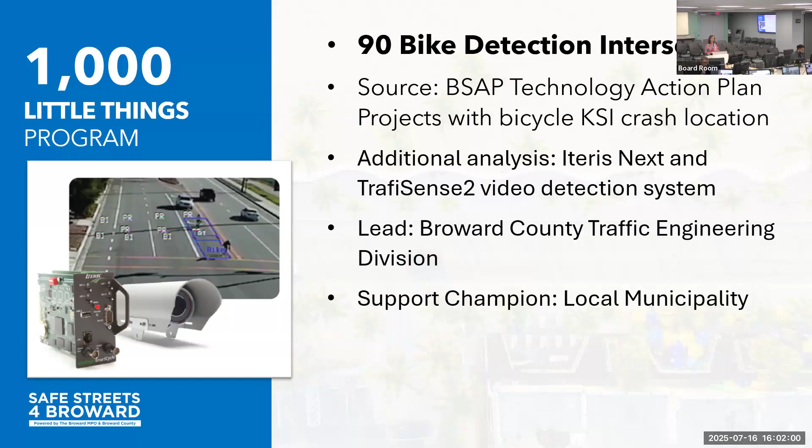So I still need to cross-reference the 90 locations with the Iteris locations to make sure that it's possible. That's left for me to do. Of course, this would be led by traffic engineering with the signal maintenance division, and then I'll get the local municipality their list.

Emergency preemption was also listed as a technology improvement. We did a mapping of where we had response times greater than 11 minutes, and then cross-referenced that with the existing preemption map in the county, which came up with 30 locations. These are intersections that don't have preemption but have response times greater than 11 minutes. My understanding from the county was that these devices would need to be championed by the local fire department. So if it's in your city, I'll get you a list, and the fire department would have to go to the county and put up the capital for these projects and coordinate. But then the county would maintain it after installation. So we identified 30 of those.

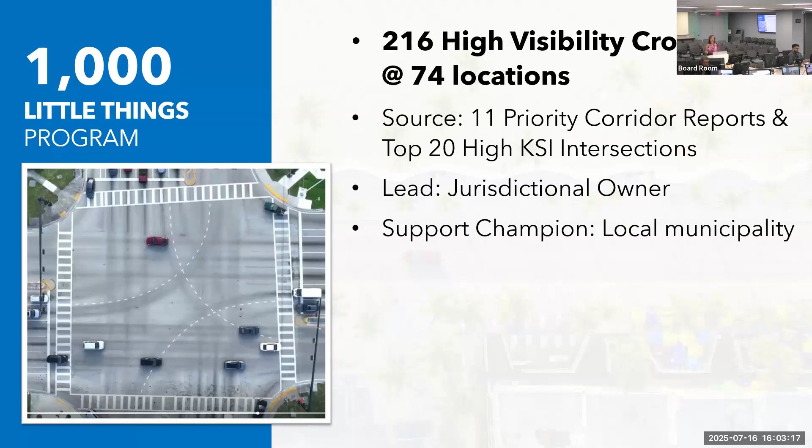The next one is high visibility crosswalks: 216 individual crosswalks at 74 unique intersections, located through our 11 priority corridor reports plus the 20 high KSI intersections we identified. These will be given to the jurisdictional owner, FDOT, county, or city. And if it's an FDOT corridor but in your city, I'll also give you the list.